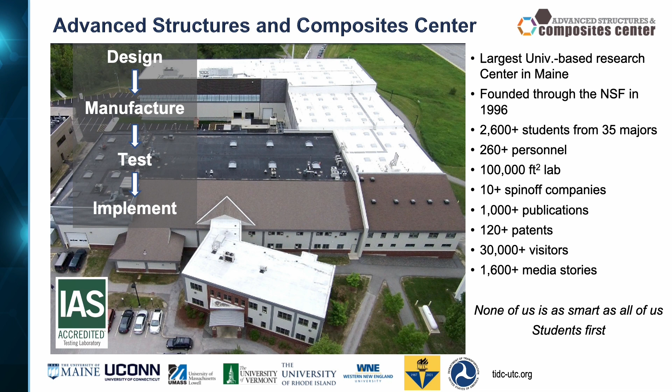And in addition to focusing on basic research, we really do have a strong ethos about bringing research into practice, and that's reflected in the over 100 patents that have been developed at the center, 10 plus spin-off companies. So it's really a wonderful and unique facility, and if any of you have a chance to come up here and visit it, I would really recommend it.

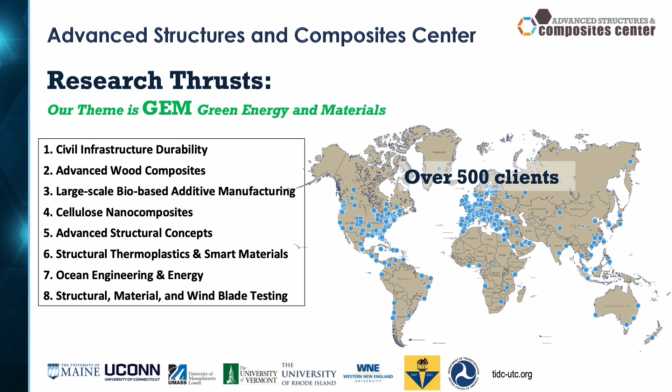Now, the main theme within the ASCC is green energy and materials, and there are 8 research thrusts that support that. And right at the top of the list here, thrust number 1 is civil infrastructure durability. And that is very important to the Transportation Infrastructure Durability Center. But playing into that, of course, you'll see examples of large-scale additive manufacturing and how that supports our TIDC objective, as well as advanced structural concepts, structural thermoplastics, structural testing. So many of these research thrusts are really relevant to what we're doing today. And the Advanced Structures and Composites Center has over 500 research sponsors and clients from around the world.

Civil infrastructure durability has long been a focus area of the ASCC, and we're really looking to develop novel structural systems and hybrid, composite, enhanced thermoplastic materials that last longer, they're more durable, they're faster to construct and erect, and you'll see some examples of that in a few minutes. And this really led us to pursue the Transportation Infrastructure Durability Center, and in particular going after USDOT funding for the Region 1 New England Transportation Center.

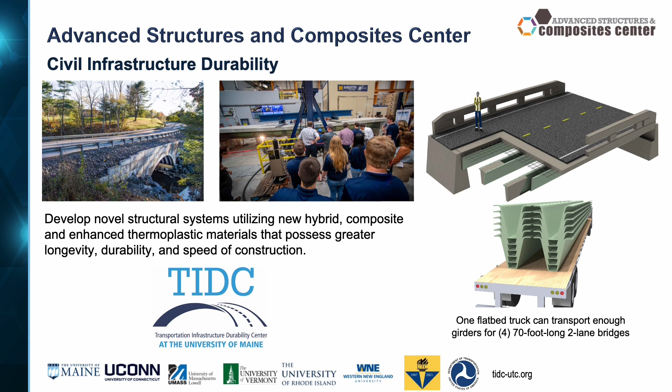And the TIDC is a consortium of multiple universities. And I want to point out that this is not just the University of Maine. Without our partners, we would not exist. And you see them listed down here at the bottom. We've got UConn, UMass Lowell, UVM, URI, Western New England. We have at least one university from every state in New England, with the exception of New Hampshire, and we're hoping to change that actually in the future.

And our research is guided by DOTs and industry. Every project has a technical champion. We focus on real research needs. We've supported over 250 students, funded 75 projects, 53 of which are active. Nearly 100 faculty and staff researchers across the 6 partner institutions have been part of this. We have 4 major research thrusts: monitoring and assessment, new materials, new systems, and connectivity for enhanced asset and performance management. And you'll see examples from research from some of these thrust areas in a few minutes.

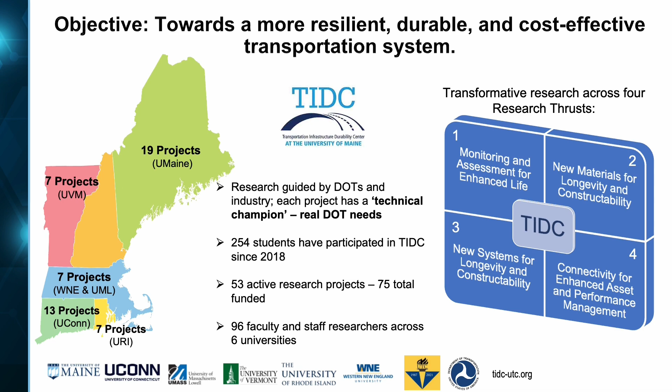A backdrop to this that is not unimportant is the Senate passing the $1.2 trillion infrastructure bill. And $110 billion is in there for roads and bridges, and that will help support university research as well as actually paying for construction and repair. But there's also $66 billion in that bill for railroads, and that will include upgrades and maintenance to our passenger rail system and our freight rail safety.

And I think we all here believe that we know how important this is and how critical it is to maintain this rail infrastructure, and actually not just maintain it but make it better, because it's extremely important to the economy of this country, and it's exceptionally efficient as well.

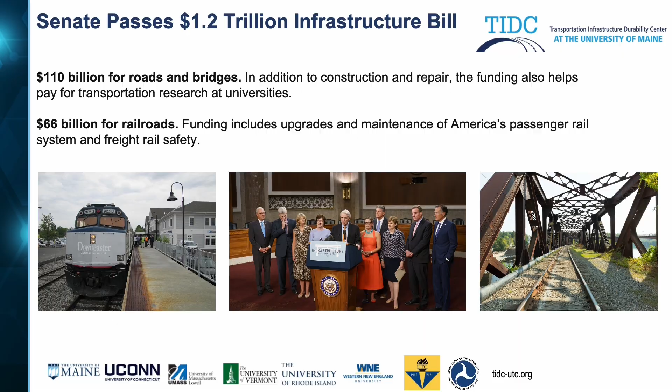Our advisory board is something that really sets us apart among other university transportation centers. We have an advisory board that's chaired by Dale Peabody from the Maine DOT. He's a great leader, and he does a wonderful job of chairing this group. We have a representative from each one of the New England state DOTs or transportation agencies on there as well. And those are the folks that are looking over our shoulder, making sure that the work we do is relevant and it's addressing the problems, the transportation-related problems that they're concerned with.

The TIDC also has a management team. The director, Habib Dagher, Jim Bryce is the program manager, and we have other staff members and faculty representatives from each one of our partner institutions. So collectively, we also help set the vision for the TIDC and keep it moving forward.

I want to give you some examples of research projects that we've successfully conducted so far in our relatively short 5 years that we've actually been in existence. One is the development of the G-beam, a composite bridge girder. It's a tub girder. It's corrosion resistant, made of E-glass and FRP composite, designed to last 100 years with little to no maintenance. Developed at UMaine and patented at UMaine.

It's got some great features. It weighs as little as 1/3 that of a steel girder. One flatbed truck can transport enough girders for multiple 60, 70-foot long bridges. It's got a really unique way of connecting the concrete deck to the beams that allows for future deck replacement with minimal destructive work. And we've been partnering with UMass Lowell recently to conduct live load testing on the first such bridge built of this type, the Grist Mill Bridge.

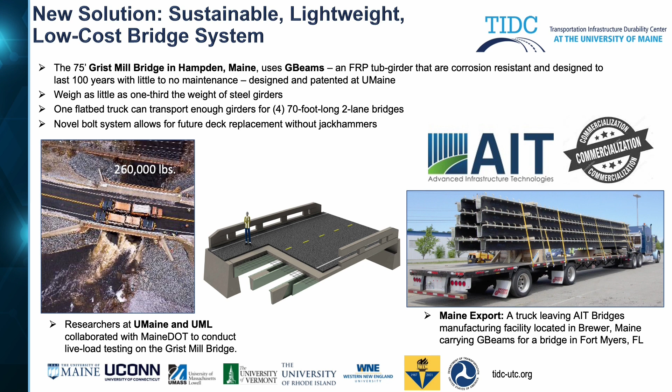At this point, I'd like to show a video of the erection of the girders at the Hampden Grist Mill Bridge. This is the first bridge built with the G-beam girders. We had developed that at the University of Maine, and this is a really good example of research into practice. The Maine State DOT saw that we had developed these girders.

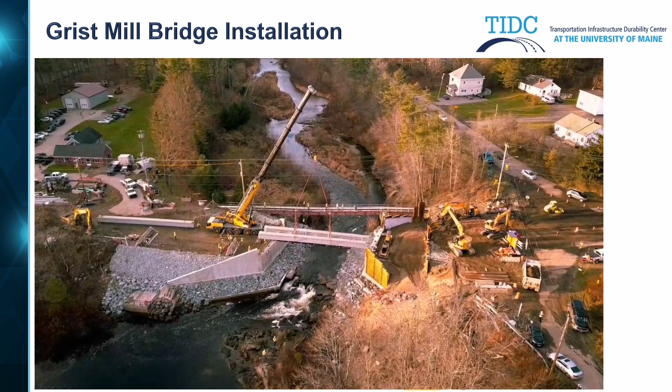We'd run some tests. We demonstrated their capacity, and it was really a show of faith. They said, "Okay, we're going to put these on U.S. Route 1A just south of Bangor, Maine." Notice here you've got 2 girders being lifted into place with a single crane, one pick.

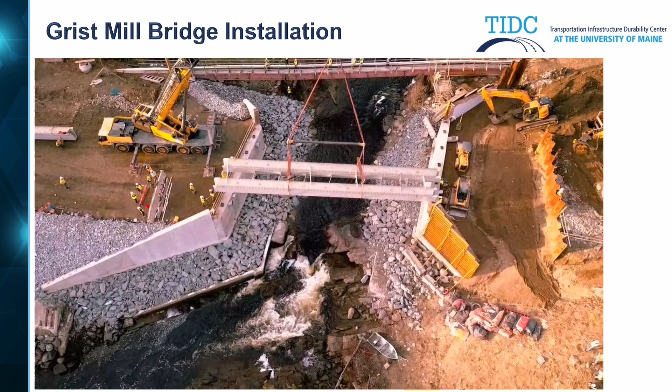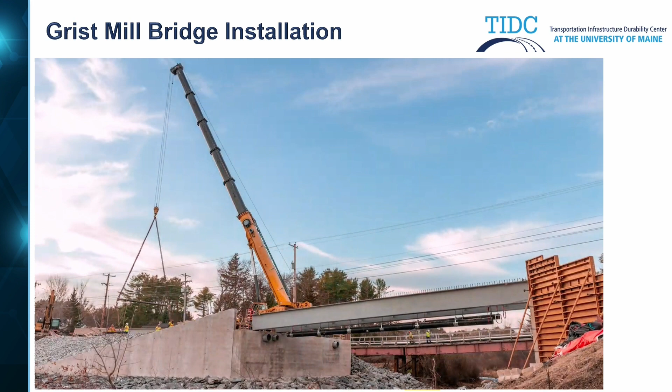That's only possible because the girders are so lightweight. The other thing to notice is they're connected together by utility hangers, and pre-attached to the girders are a sewer pipe and a water pipe. And so this really expedited the connection to utilities.

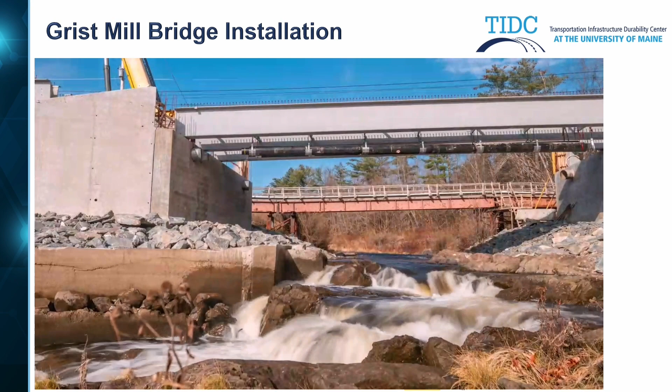The crew did not have to come in there in the bare girders and do overhead work to attach most of the pipe. Ultimately, this bridge has 5 girders. 4 of them were lifted and placed in pairs, and 1 was placed as a single girder.

Now let's talk a bit about our research thrust areas. Under Thrust Area 1, monitoring and assessment for enhanced life is an area that we've been working in quite a bit. This is a project that has jointly involved the University of Maine and UMass Lowell.

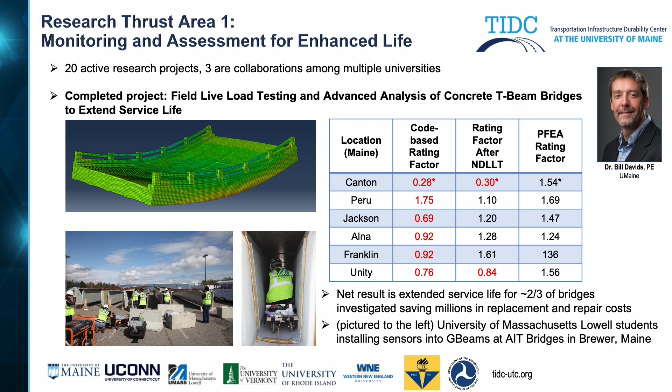We're very interested in assessing the condition of our existing infrastructure, and seeing if we can make it last longer, seeing if we can get it to stay out there without being repaired or retrofitted. That can save the DOTs a lot of money, and we've been successful in that area.

At UMass Lowell, Dr. Tzuyang Yu has been leading some really interesting research on electromagnetic detection and identification of concrete cracking in highway bridges. We've all seen plenty of old concrete bridges out there with corroding rebar and spalling concrete. Detecting cracking is really the first step towards determining whether or not you're going to have a problem, whether or not it's going to progress, whether you're going to get corrosion of that rebar.

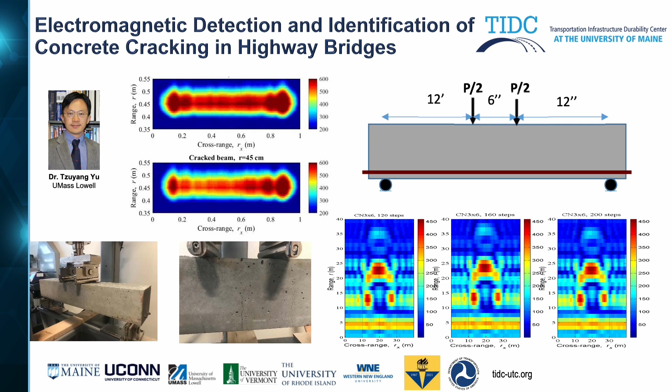Tzuyang's been taking a multi-pronged approach that incorporates both the development of really novel technologies, laboratory testing, and then in situ, in the field work to determine its effectiveness at full scale as well.

Dr. Vivian Wang at UMass Lowell has been working in this area as well. Distributed fiber optic sensing systems for bridge monitoring. This is a great picture of a rusty old bridge. I always ask my students, when you drive around, do you look at rusty old bridges? And you know, these rusty old bridges, we need to worry about the kind of shape they're in and how much load they can carry.

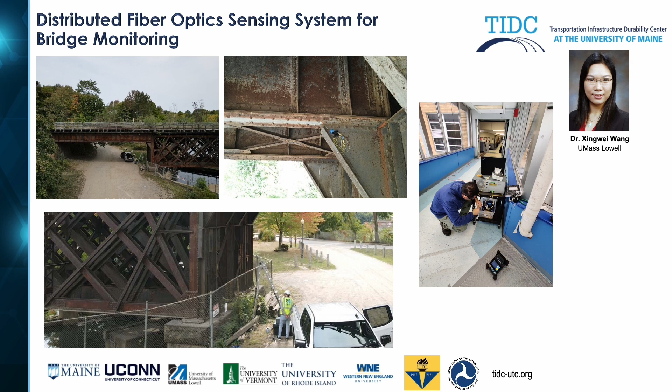And Vivian's been doing some really interesting work on developing fiber optic systems for monitoring these, increasing the potential for being able to remotely assess condition, make decisions in real time about what needs to be done to a particular structure, detecting damage, and especially if it's severe and needs immediate attention.

Research Thrust Area 2, New Materials for Longevity and Constructability. 16 active research projects in this area. A great example of that is the Penobscot Narrows Bridge in Prospect, Maine. This bridge has been in place for a number of years, but it provided a wonderful opportunity for monitoring because it contains 3 carbon fiber composite cable strands within it.

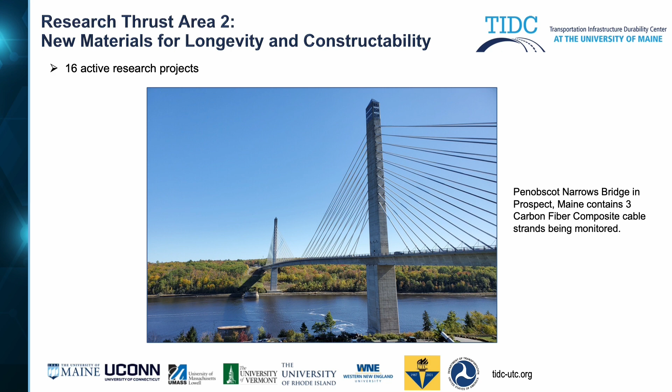Professor Roberto Lopez Anido at the University of Maine has been monitoring this bridge and assessing its behavior, in particular how those carbon fiber composite cable strands are performing under thermal and mechanical effects for quite some time, and he's got some really interesting results from that.

Professor Lopez Anido has also been leading some really interesting research in 3D printing and automated manufacturing for the creation of concrete formwork. One area that he's done this in is the creation of formwork for railroad ballast retainers. And that printing technology allows molds, forms, and tooling to be made with far lower labor costs, almost none.

And we can really optimize the design of precast concrete parts because the additive manufacturing cost for making a complex form is really small. It's just a function of how much thermoplastic material you need. It doesn't depend on part complexity. So instead of having some really complicated carpentry and a lot of labor costs, you can print a complicated thing and then you can pour a really complex part.

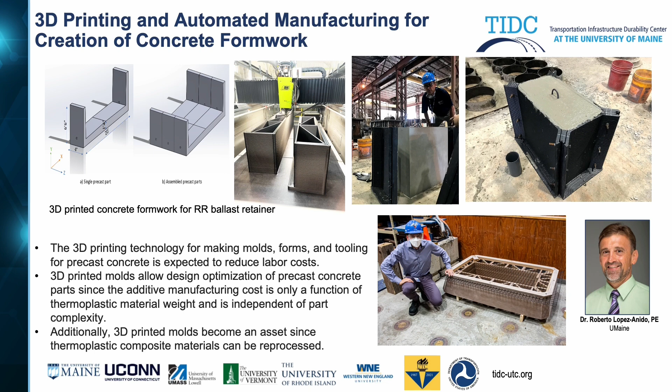And also those 3D printed molds are an asset when they're done. They're not something you just throw away, but thermoplastic composite materials can be reprocessed. They can, in a nutshell, be melted, pelletized, and then used to make other thermoplastic items after they've been used.

Building on this, Roberto has recently moved into the area of culvert rehabilitation, in particular installing diffusers in culverts. And these diffusers have a very complex geometry, and they essentially allow you to increase the flow through the culvert through a Venturi effect. And the challenge there is the geometry is very complex.

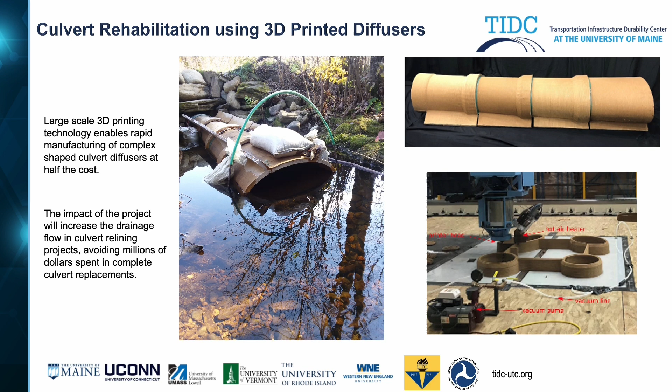And to manufacture this out of a composite material in a conventional way through, say, a vacuum bag infusion process would be very expensive and labor intensive. But we can 3D print these complex shapes relatively quickly in an automated way. And this allows a cost-effective solution to be deployed that has some real performance advantages.

Another topic that has high relevance to what you're going to hear about today is the prevention of stress-induced failures for prestressed concrete crossties and railroad track structures. This work is being led by Dr. Moochul Shin at Western New England University in Springfield, Massachusetts, and he's been looking at different ways that we can look at stresses in concrete railroad ties, different types of pre-stressing wires, and how they affect performance. And this is a great project.

He involves a lot of undergraduate students as well as graduate students in his work. He's looking at different types of concretes and mix designs in conjunction with different types of pre-stressing wires. And he's really looking at ways of optimizing these railroad ties and making some nice advances there.

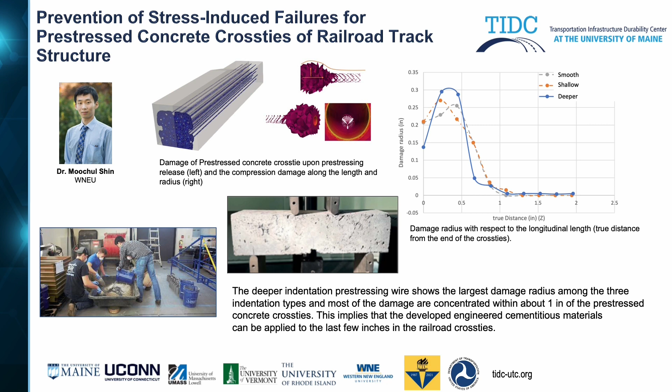Research Thrust Area 4 is focused on connectivity for enhanced asset and performance management. We've got 4 active research projects ongoing right now at Maine, UConn, and UVM. Connected vehicle applications for improving infrastructure safety and durability at Maine, as well as safety assessment of New England roadways during COVID-19. At UConn, they're actively involved in proactive and intelligent risk management in complex civil infrastructure project systems.

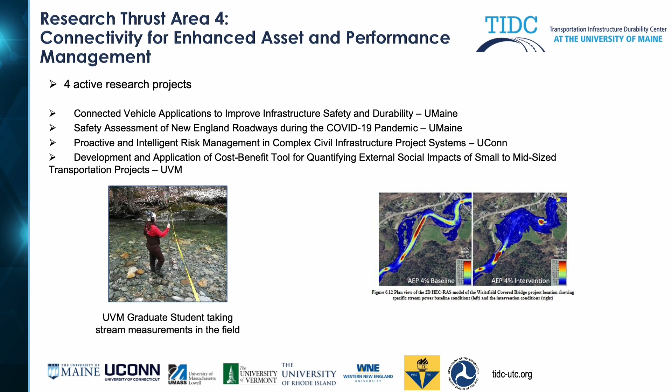And at UVM, the development and application of a cost-benefit tool for quantifying external social impacts of small to mid-sized transportation projects.

At this point, I'd like to thank our conference planning committee before we move on. Jim Bryce is the TIDC Senior Program Manager. His leadership is vitally important to the success of this as well as everything else we do. Dale Peabody, whom I've mentioned earlier, is the Director of Transportation Research at Maine DOT. He's been very involved in putting this conference together. Ramesh Malla is the institutional lead at UConn, professor in civil and environmental engineering. You'll be hearing from Ramesh later today. He's very involved in railroad-related research.

Moochul Shin, Western New England University. And we've got some staff members that do a great job. Amanda Collimore, Education and Outreach, Aaron Skank, our Communications Specialist, and Jenna O'Barron, our Administrative Specialist at the TIDC. They really keep the wheels greased and keep these things going.

At this point, I'd like to introduce our keynote speaker. It's really a great pleasure. David Fink. He's a fifth-generation railroader. He began his career at the age of 15 working on the Conrail track gang in New Haven, Connecticut. Not many people can claim that today. He chose to study transportation logistics, received his bachelor's degree in transportation from Northeastern. He followed up with a co-op at the Boston and Maine Railroad, so we've got a Maine connection there.